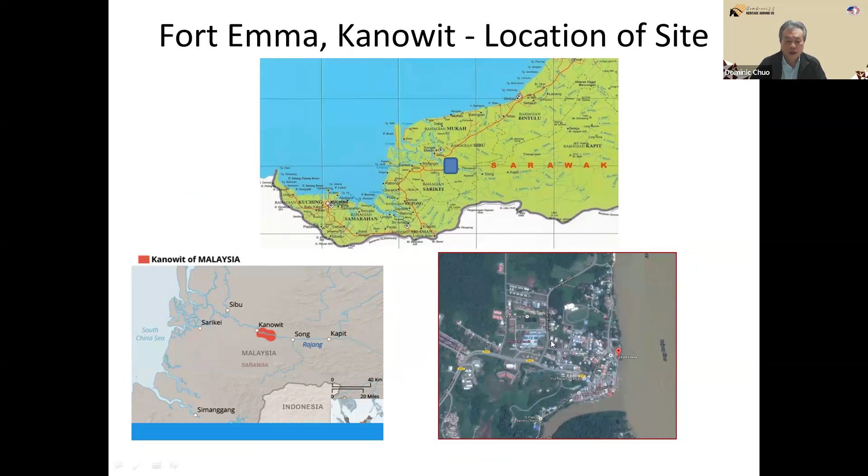This is what it is before restoration, quite dilapidated. There were telecommunication officers there, and it was already declared unsafe at the time before restoration, because due to the erosion next to the building, the Public Works Department had declared it unsafe, so they had to move out and it was just left there. In fact, when we were doing the design at tender stage, there was a big erosion next to it near the town center, town square, so we were actually quite worried the whole building might topple off.

So this is some details. Client is the museum department. Implementing agency is the Public Works Department. We are the conservation architect. We have C&S, M&E, and QS and surveyor. The conservation advisor is Prof. Ghafar for this project. We also engaged a project researcher looking into the history, all the documents, maps, and all that, Cik Noraliza.

During construction, the contractor appointed Architect Haris to be the contractor conservator to do all the documentation. Just for context, it was an 18 month contract, supposed to finish December 2019, but eventually finished 14th of March, just before COVID started on March 18th, before the lockdown. The final handing over was 16th of July, when there was a small window when COVID restrictions were lightened, so we quickly did the handing over.

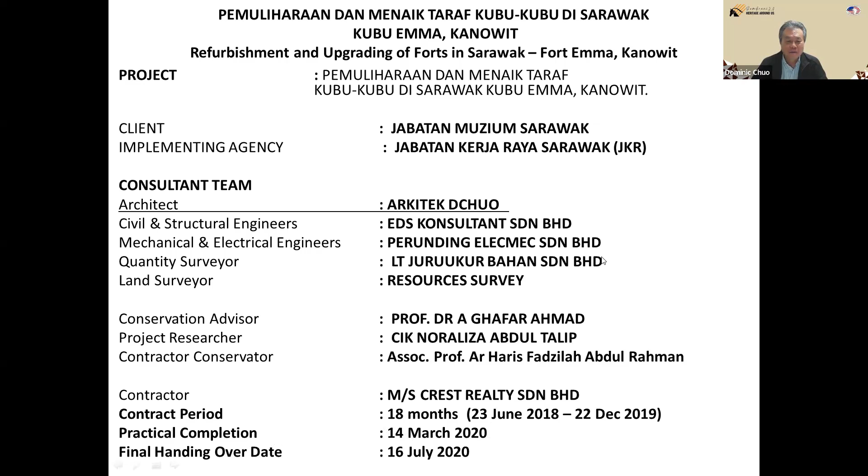So this is the survey of the fort before. You can see near the corner there, that is the erosion, already next to the building. The hatched area is actually the boundary for this fort, and you can see the boundary, the land, is quite small. At the bottom there is the riverfront, and at the top there, the round part, that is the town square. But this is in survey.

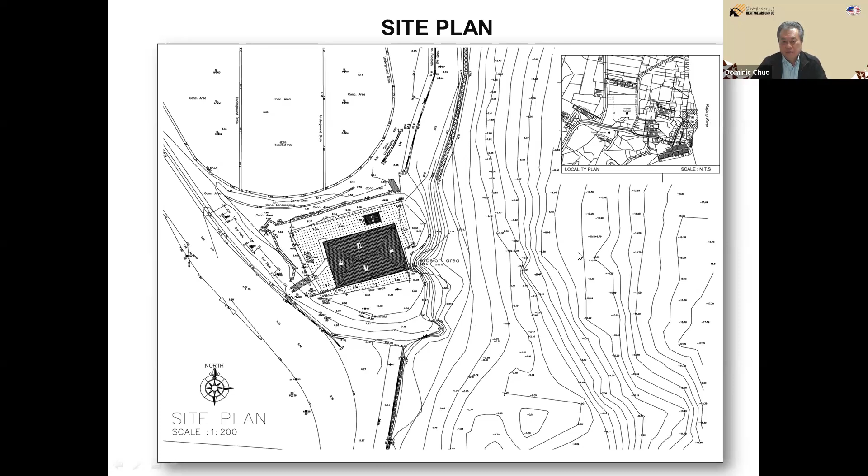Just to give you some idea, you can see on the right top, the erosion is next to the apron already. You must know that the distance from the height of the fort to the river is about more than 10 meters, so it's very high, and it was very risky at that time.

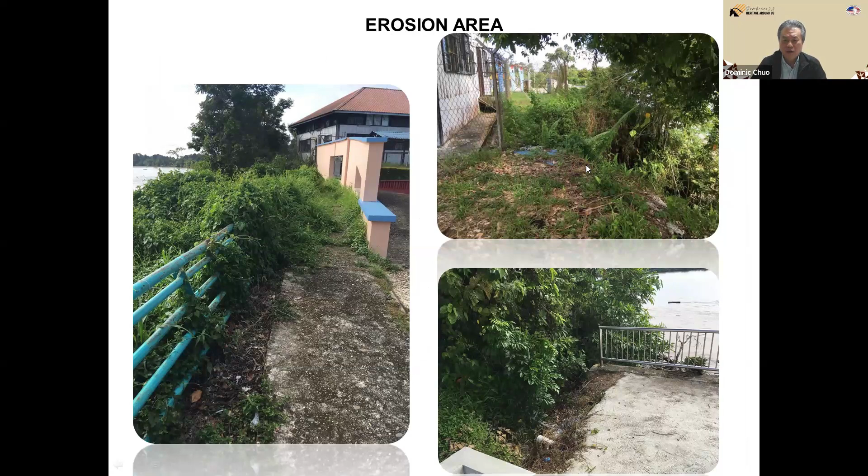So you can see the condition at that time. The first thing we did, of course, was the measured drawing. We spent a few days there, my staff and I stayed there, and we managed to get the measured drawings done. Just to give you some idea.

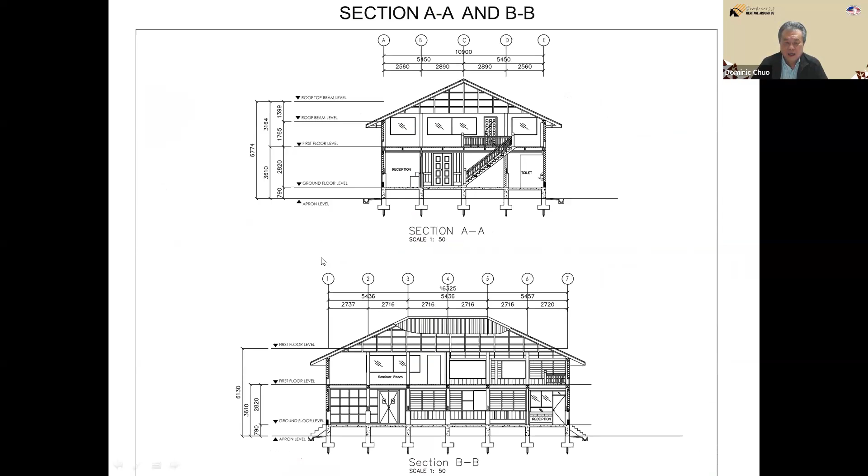And here, there's a toilet on the ground floor, basically a timber platform, and some sort of concrete looking floor with the toilet inside. Upstairs there's gypsum board partition. So this is the measured drawing.

Just to give you some idea, from the left, the waterfront there, so we have to join up. Upstairs, you can see the partition from Celcom, that is the telecommunication company, with all the partition. That's why they had to move out because it was unsafe.

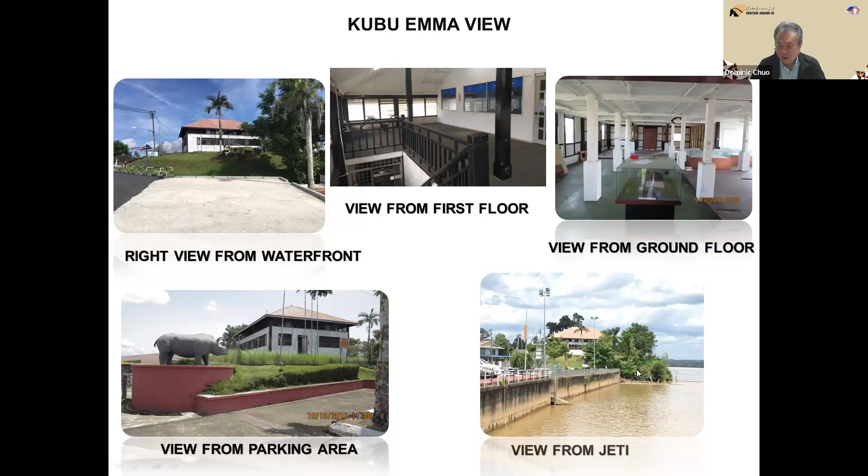Then you can see on the ground floor a lot of concrete stumps there, some already broken, so that's why we were very concerned about the structural integrity. Down there we can see there's a mascot rhino, it's quite common for councils to have a different animal, fruit or fish for the district. On the left and right bottom, you can see all the trees have grown already, so we are actually quite...

After that, at the same time as architect, we also did the dilapidation report and recommended what to be demolished. But basically, we wanted to retain all the original material, that is the belian or the ironwood, the structure, the roof, not the roofing - the roofing normally is already steel roofing, but the truss, the trellis there is not, and then the external cladding and all that.

So as you can see, the stumps are eroded over the years. I think the belian might have eroded, so they just cast some concrete there. Somehow it still stands, so except for the side column, they are all still structurally very good.

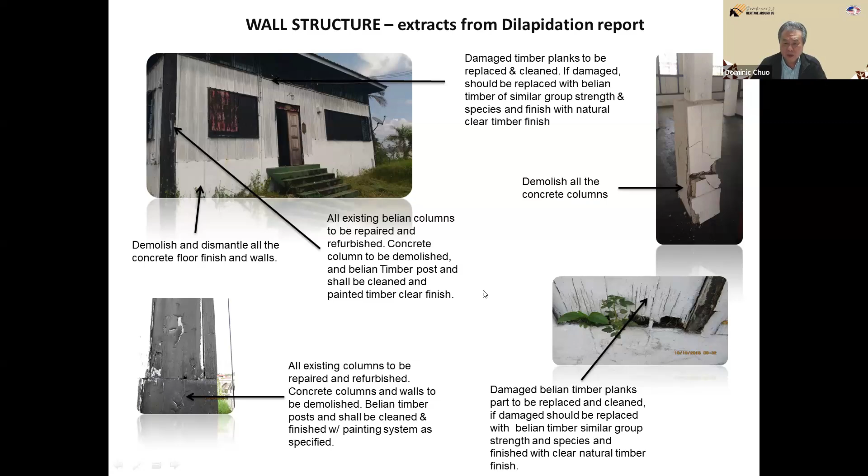Even at the bottom right there, you see the planks. These are all belian planks. At the bottom, exposed to weather, some are already rotten, so they had to be replaced. But we try to retain as much as possible of the original material.

All the windows are actually new ones, so we have to remove the doors, the grill, the astro antenna, all that. Now you can see somehow.

One thing interesting, the columns are all different shapes. Some are round, some are square, some are octagonal. The story is that in the era of James Brooke, each village may have been asked to bring one big column, so they're all different shapes.

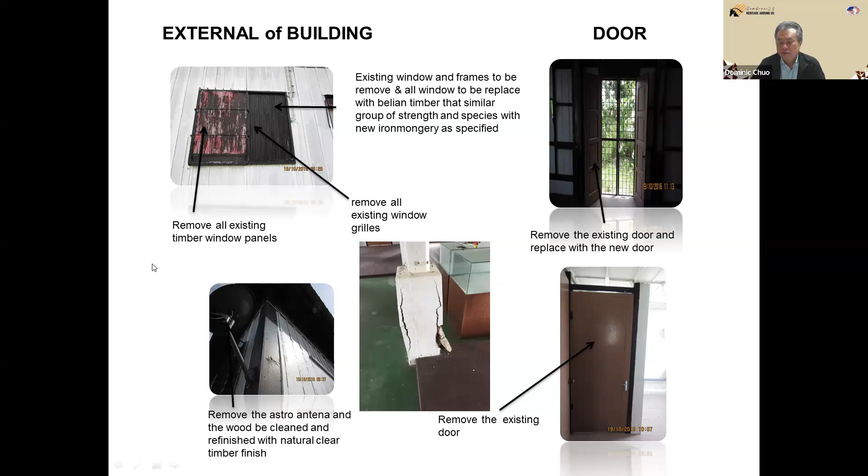Mind you, this one was first built in 1859. James Brooke came to Sarawak in 1841, so this is one of the very early forts that was built. From the dilapidation report, all this concrete, we are going to remove it.

Very interesting, there's what we call a clay crocodile. They assembled the crocodile shape using clay and earth. This one we will retain, we'll just shift it. The staircase is still quite good actually, all belian.

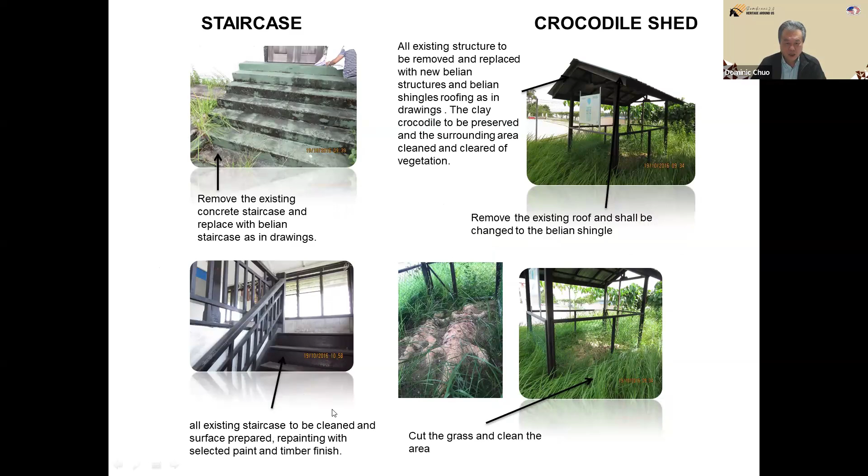So this is our proposal after months and months of discussion with the client, with the museum, and even the public works department, where a couple of architects are handling this project. Everybody has their view, along with the conservation advisor, and eventually we focused mainly on the conservation of the fort itself, and how we handle the erosion, the retaining wall, and the walkway.

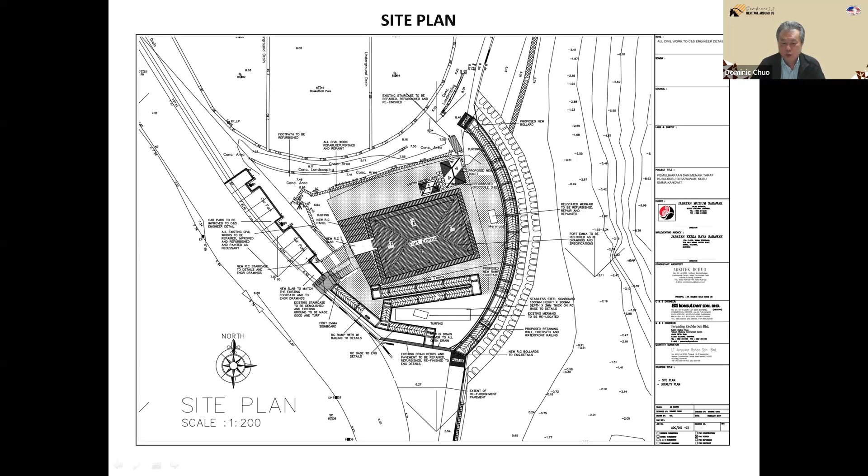So this is what we propose, to join from the waterfront at the bottom up to the town square, and there is a height difference of about 2 meters. So we provide ramps as part of the restoration, which can be used for viewing also, since at the bottom it goes straight to the town center.

So this is maybe a clearer picture. It's actually next to the river. In fact, this is the second proposal. The first proposal, we actually wanted a 2-layer walkway, but after calculating costs and all that, we had to trim it down.

So this walkway is about 70 meters, with a curved retaining wall, and the red building is the district council office. Our restoration focuses on the building itself and the immediate surrounding.

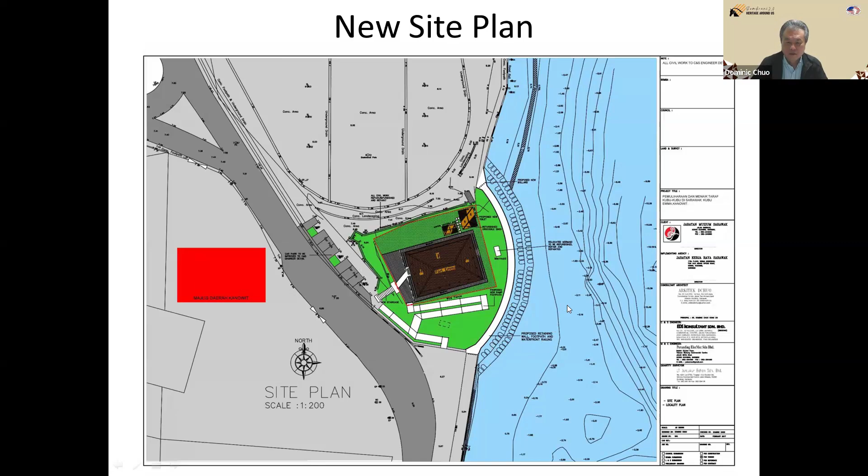You must know the red line here is the boundary for the fort. The other green part actually belongs to the council. The museum has already taken steps to acquire it, to find out, and then after that our design came about.

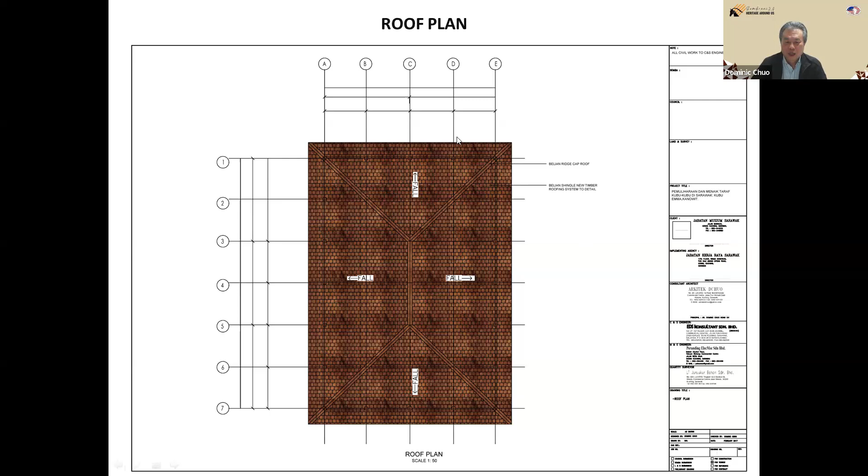The roofing is a very important component. Originally they were all made of belian shingles, but belian shingles, as you know, are not as watertight. So over the years they were changed to steel metal roofing. So in order to have belian shingles back, we have to have different layers of roofing, which I will show you later.

On the ground floor, we took out the toilet inside, which was a bit smelly. We have a counter office, and the blue area we allocated as 3 rooms on the ground floor and upstairs for air conditioning, anticipating there might be exhibits needing air conditioning. But eventually that didn't happen, so we didn't put in that partition.

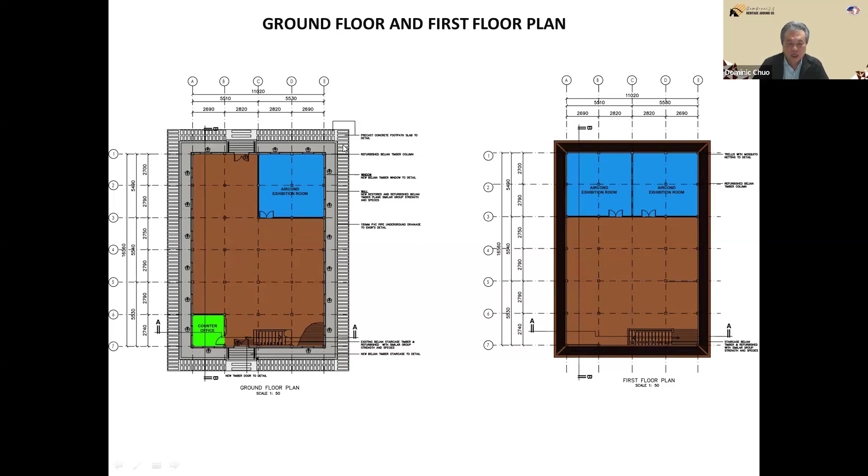So then we have a walkway around the fort itself. You can see the concrete slab, so people can walk around it. This is our final proposal that goes to tender. As you can see, it's like suspended from our research. It's supposed to be like that, but as in most restoration projects, what you tender and the eventual works that need to be done need to be adjusted on site.

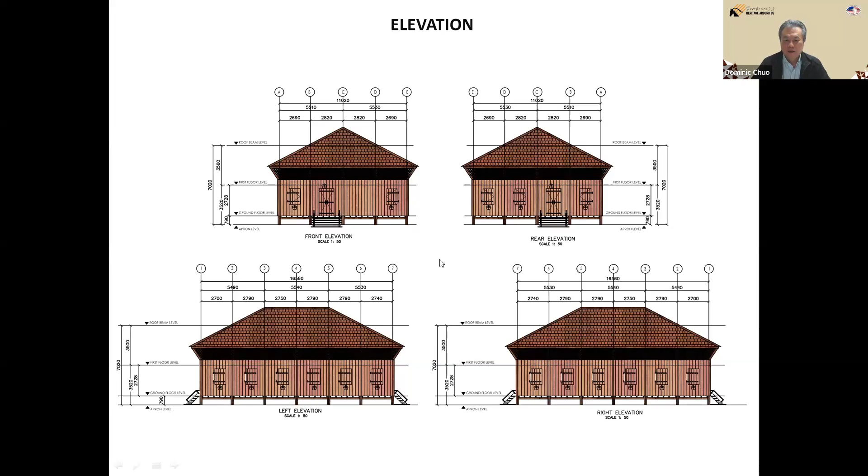And so this is the basis for our tender. This gives you a better idea of how it looks. Except for the retaining wall, it was eventually decided to go with a very smooth gradient instead of a steep one.

This is the proposal we presented to the state government, because in Sarawak, all building projects need to go through what they call the State Planning and Building Design Committee to approve all government projects. Even a small toilet needs to go through it. So these are some of the comments they made.

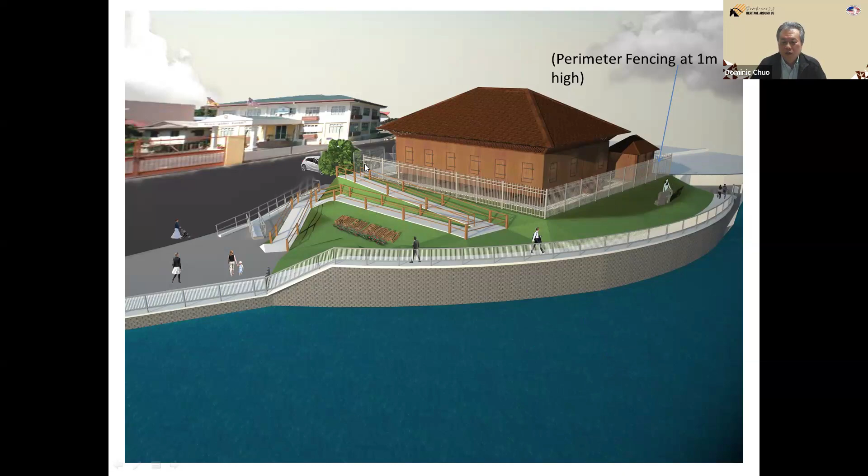Number one, the mermaid, we actually shifted from the ramp area to face the river. For the fencing, we initially put up high fencing, but they didn't want it to hide the view. But for security reasons, when we lowered the fencing, we had to put in CCTV and an alarm.

This is the entrance. It was decided that the entrance should be wider, so we amended all those things.

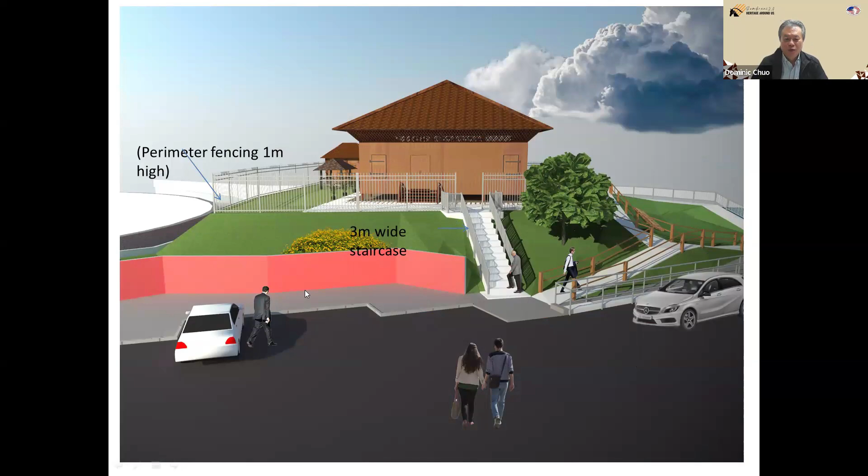Then you go for tender. It's actually one of the longest projects I have done. Usually it doesn't take that long to go to tender, but due to the heritage aspect, there was a lot of discussion and decisions to be made.

After tender and handover of the project, there is a handing over ceremony carried out by the local natives, the Iban. There are three warriors, Prof. Gaffa among them, and a ceremony where a pig has to be killed.

Also, inside the original fort there is a basket of human skulls, I think about 15 or 16 of them, more than 100 years old. These needed to be relocated outside the fort so we could do the work inside. So we made a special temporary housing at the left bottom to hide and keep them there during construction. It's a more spiritual aspect.

So this ceremony involves community leaders, the warriors, and the local assemblyman is here too. They were already allowed inside under the contract.

We have a provisional sum to allow for a few of these community engagement activities, so it has to be allowed for, otherwise there's usually no additional funds for it. The YB, the local assemblyman, is there too.

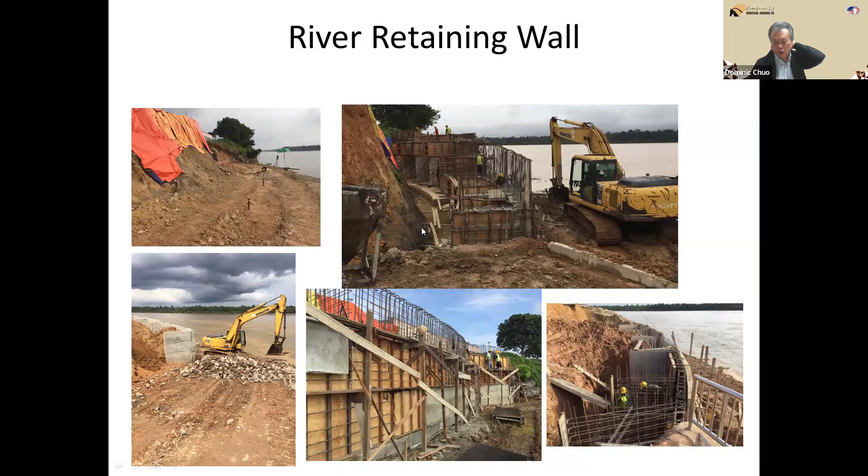Once the water rises, it reaches the same level as the road in the town, so all this will be underwater. That's why we had to quickly build this. We did a borehole test just outside the building and constructed this.

While the retaining wall was being built, we only worked on the inside. We hadn't started on the roof yet, as we didn't want to disturb any of the structures. You can see on the right hand side the column — originally they are white.

All the paint on the timber was stripped off, not by sandblasting, but using a machine similar to sandpapering. It was slow and very tedious, and took a long time.

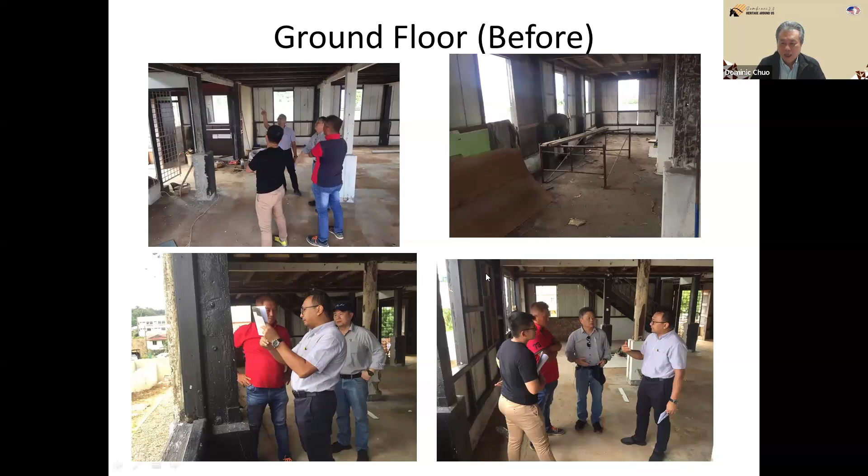The conservator and us didn't want them to destroy the original material, so we took all the paint off first after doing a paint analysis to find out the original paint color and the number of layers. Here you can see Architect Haris, the contractor's conservator, discussing how to go about all this.

It was quite challenging, as you can see in this investigation into the foundation. One of the foundation columns here, we actually had to hack through and see what was down there.

Some of the columns were actually supporting on nothing, because the concrete stump had already settled or something. So somehow the whole structure was still standing. That's why after we went through the investigation, we decided to put a proper concrete stump down there, extend the belian column, and connect it to the existing belian column.

We have to find the grade, that's why all this timber had to be sent to the forest department to verify the type, the strength, and the species. Of course it's belian, but belian also has a few species, so the replacement will be similar.

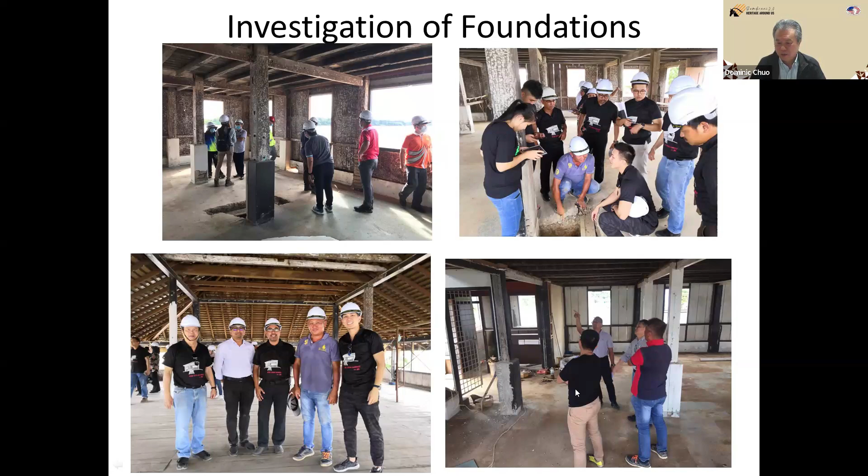So bottom left, we have myself, the two conservators, the contractor, and the public works department architect also. So while this was going on, we had the first community engagement.

As you can see, the works are already carried out, especially on the retaining wall. This is a community engagement where the consultant, the public, and the government briefed the government officers. Most of the people there are from government departments, district office and all that, so it's to educate them on what is going on and what we intend to do. The museum department gave a briefing, myself of course, and then Prof. Gaffa, and then the engineer, the QS, everybody presented.

So this sort of engagement will cost some money, so we already allowed for it inside the contract as a provisional item.

By the time we stripped off everything, this is how the house looked. You can see how the new columns are being spliced into the existing column. So we sort of worked it out like that.

Down there will be a concrete stump, but this time we did it properly, excavating down with proper RC and all that. Initially it looked like a concrete slab, but these were just mass concrete of uneven thickness, some thick, so it wasn't very stable. This took a bit of time, and you can see at the bottom left how it's been spliced into it and anchored into the concrete slab foundation down there.

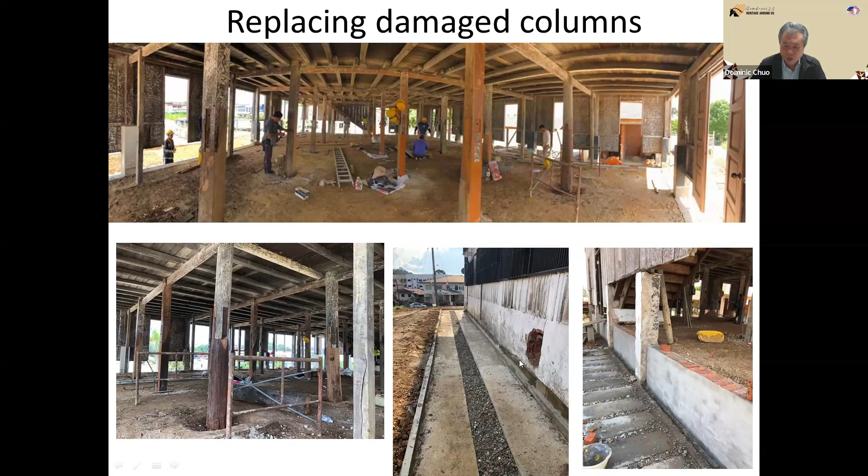In the center bottom, you can see we actually knocked a hole into the wall to see what's happening inside before we took those decisions. That's how it is.

You can see the belian column, the bottom part is new, embedded into the concrete foundation footing. After that, we will do a proper slab on top.

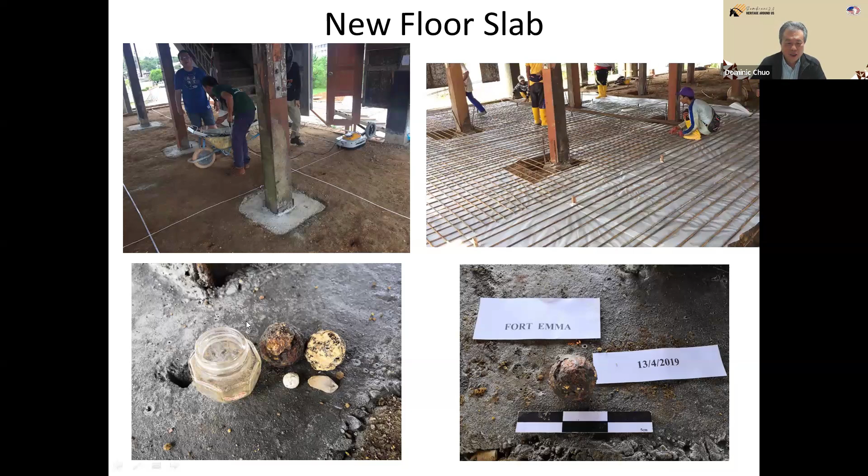I'll also show this: during that excavation we actually did one archaeological pit. Dr. Saiful, you might appreciate this. These are some of the cannonballs that we found. This is the archaeological pit. In fact, we allowed for 3 archaeological pits in the contract, but eventually after they did one, they said that was sufficient.

This company, I think some of them from USM in Penang, had a few experts, archaeologists, from there, and after that they did a report and displayed all the things that they had excavated.

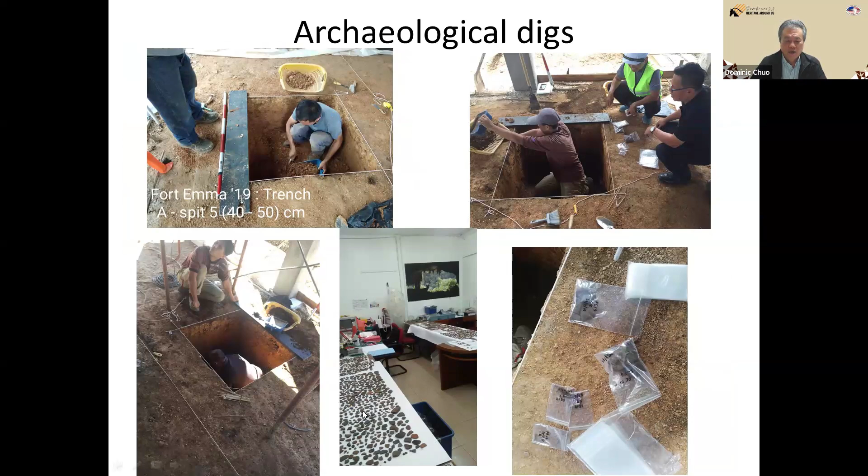Just now you saw some cannonballs and the bottom part of a whiskey bottle. They were able to label it by year. The most bottom one would be the James Brooke era, then the Charles Brooke and different Brooke eras, as the base was built up.

So this is all the equipment they use during the archaeological dig.

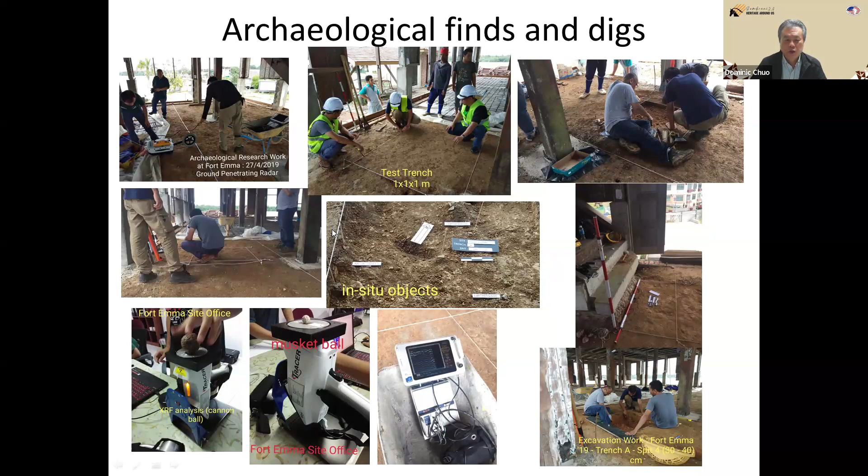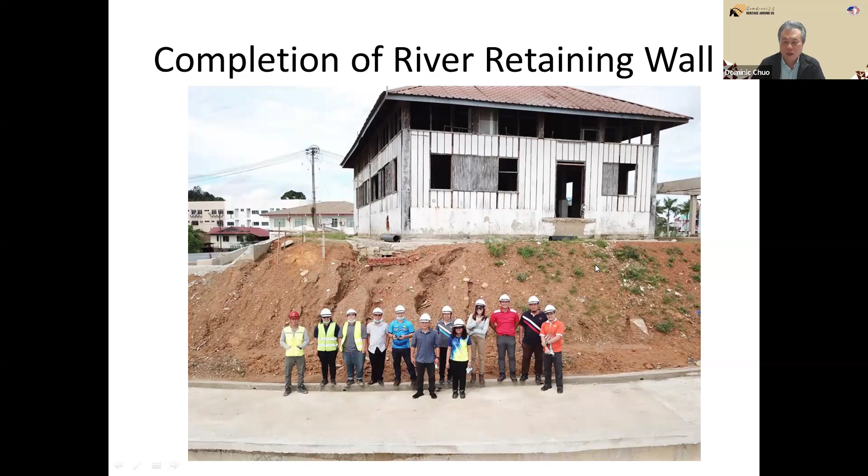Once the retaining wall is done with the big walkway there, the connection, you can see there's a slope, so at least that is stable. You must see the original erosion is up to that corner of the building already. So now with this one, it's stabilized the whole surrounding. And with the works done inside with the columns, the whole building is quite stable structurally.

After the retaining wall completed, we just take a picture. You can see it's actually sloping, it's a 2 meter difference from left to right.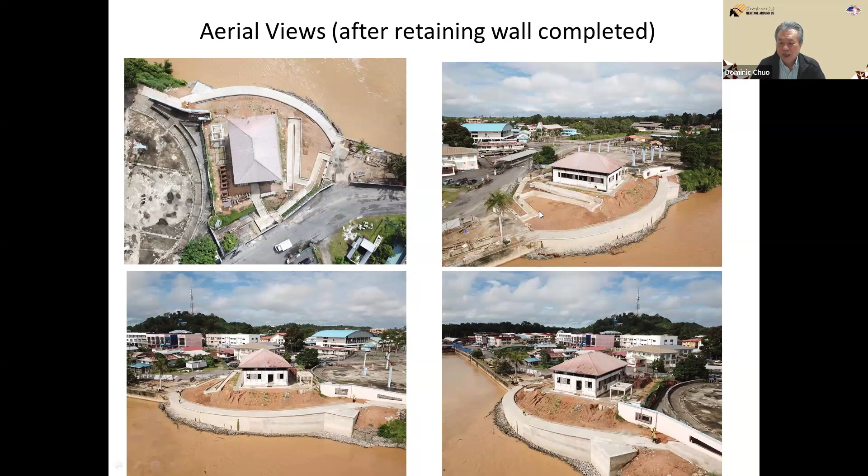At that time, the roof of the building we haven't touched, because we dare not even do the temporary roofing, since temporary roofing needs a structure around it to carry it. So we just did the ramps and the surrounding first.

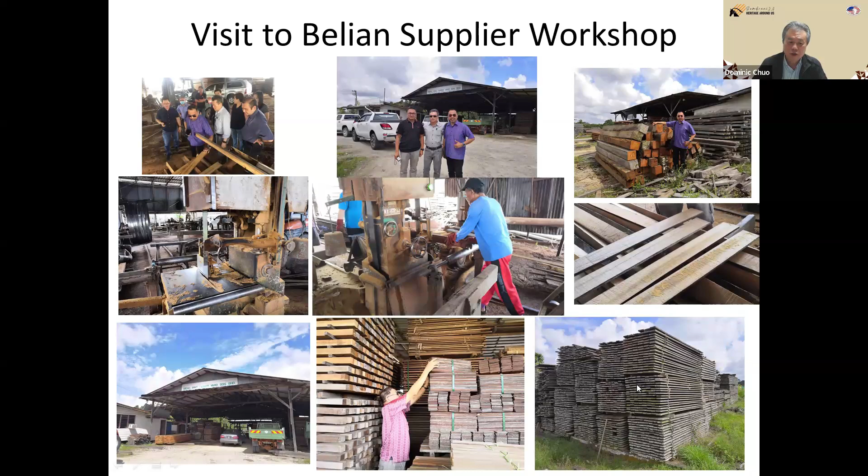As we know we wanted belian shingles, so we quickly went to visit the belian supplier near Sarikei, with the whole team. Eventually we selected well-seasoned belian shingles, 6mm thick or 8mm. We eventually selected the 6mm because it's lighter.

A mock-up was done for the belian shingles. As you can see, the battens, we have a metal sheet, a waterproof plywood, and then insulation and all that. Quite a number of layers to make sure there's no leakage.

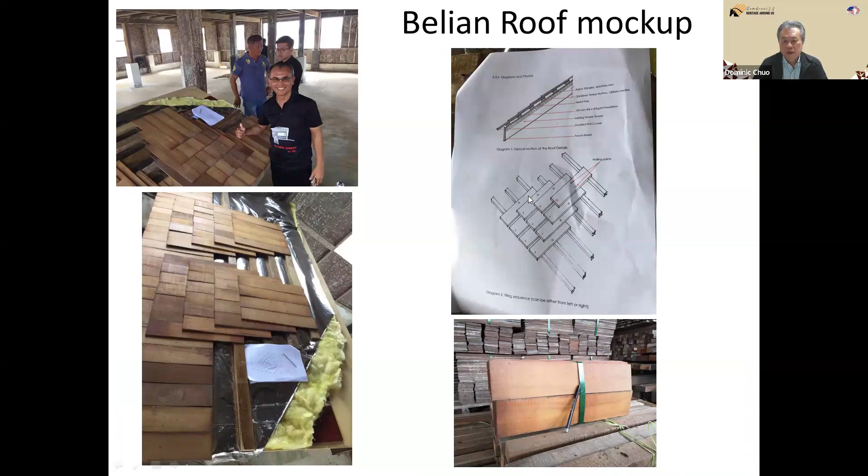After this was approved by everybody, the temporary roof started to come out. So this is just to give you a sense of the scale.

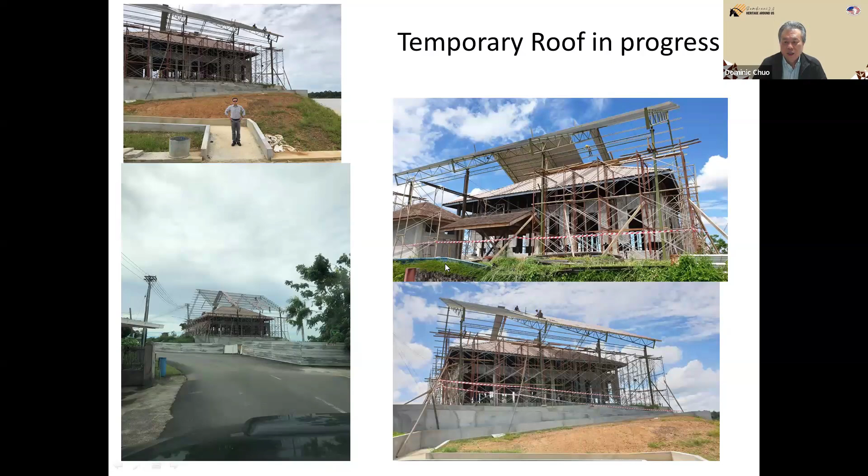It's quite huge. Then halfway through, the second community engagement happened, with different government officers and students from UTS invited. I think about 100, more than 100 people attended.

This is also allowed in the contract. This sort of project, we need to engage with the community, otherwise there'll be a lot of questions and probably complaints. Once they know what's happening and how important it is for the heritage, everybody is more comfortable, because it takes a long time, almost 2 years to finish.

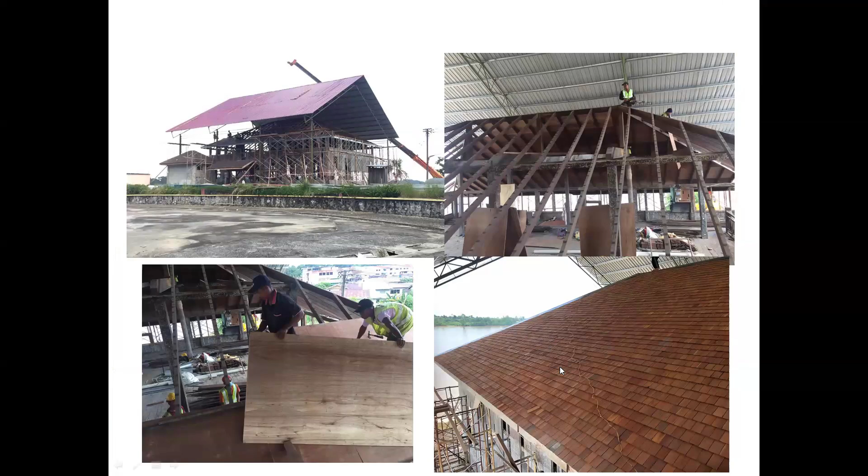These are some of the press releases that we made. So the belian shingles are up. You see the truss, those are original truss, of belian. The belian shingles, you can see after it's done, it actually looks very nice.

That means there are actually gaps in between, I won't say holes. So when you walk upstairs, the dust will come down, right? So that is not preferable. So every piece of the first flooring boards was taken out and refurbished, made straight so that there's no gaps.

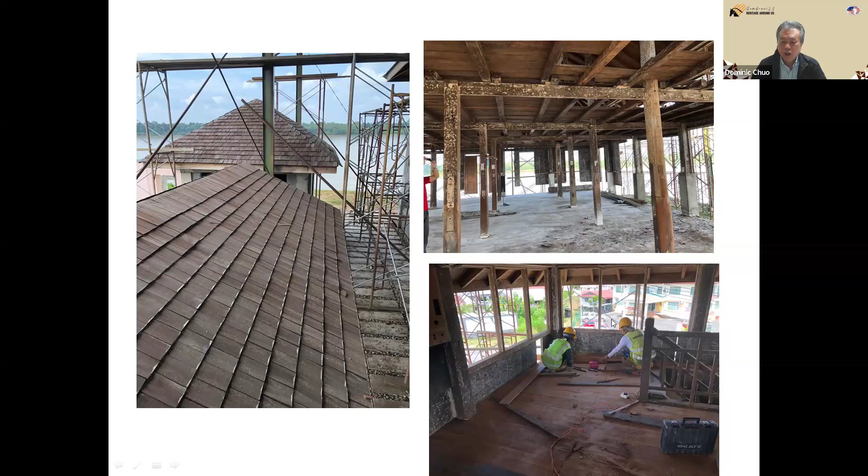After doing all that, removing the damaged part, you can see here near the staircase, these are all new, because after we went through the whole upper floor floorboards, pushing them together to close the gaps, we had to add in new belian. The thickness of that is compatible with the existing ones.

On the ground floor, you can see we put on the concrete slab, as you saw just now, and belian battens before we put on the belian floorboards on the ground floor also, some on the ground floor.

At the same time, you can see all the external panels are already taken off. So we have to clean it up, repair it. Some damage we have to cut off and connect new belian panels onto the existing one.

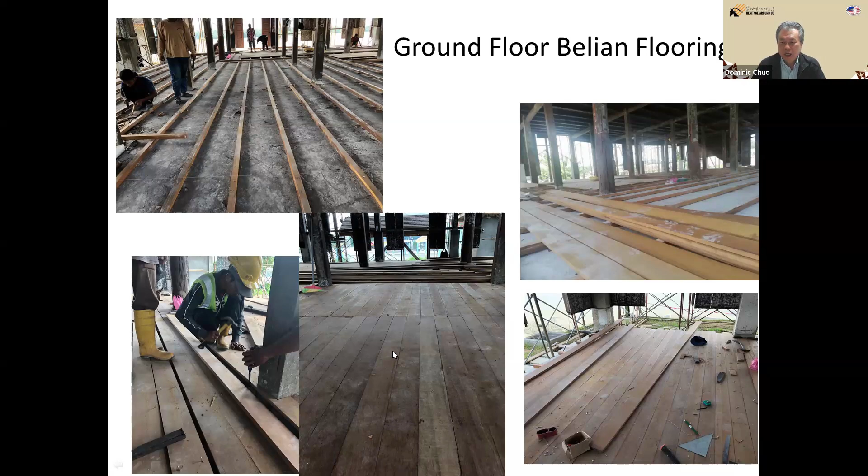But we keep as much as we can, whatever can be used. So you can see, these are all belian timber on the ground floor. On the right hand side, you can see how we splice it in to connect the two columns with bolts and all that. Ground floor and first floor, that's how it finished under the belian shingle roof.

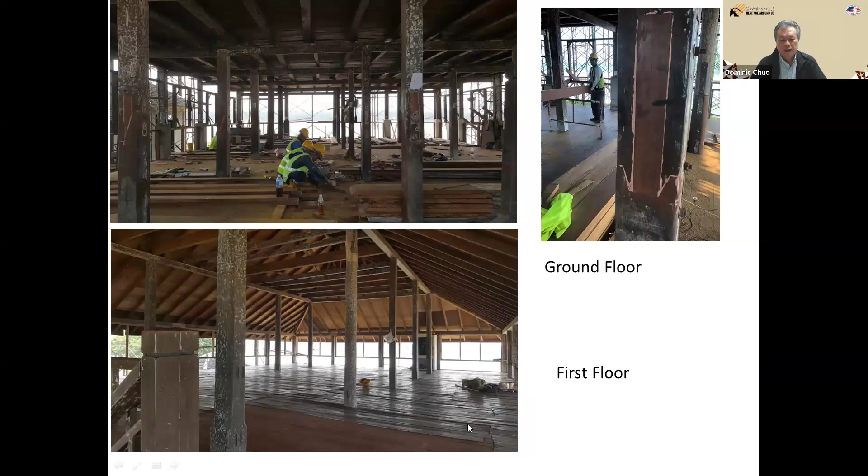What you see is the original truss plus the plywood, that the later will varnish. That will be the finished product. So just to give you some idea on how we do it.

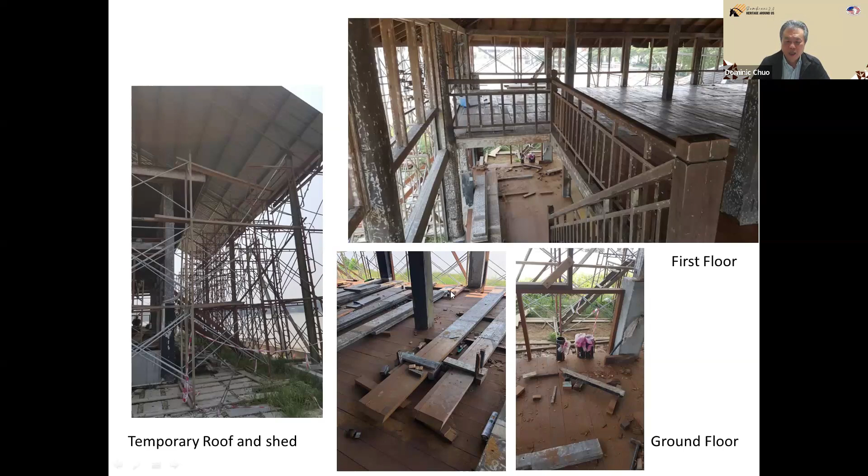The external panels are the last to be fixed eventually. At the center bottom, we can see the external panel. We sort of clean it up, because the wall panels originally had a lot of gaps, which means when it rains, some of the rain will get into the building. So all these are straightened and all that so that it's more watertight.

We also have references from so many forts. So what we can do, especially where some of the elements are missing. On the top left, you can see the windows there. There is this...

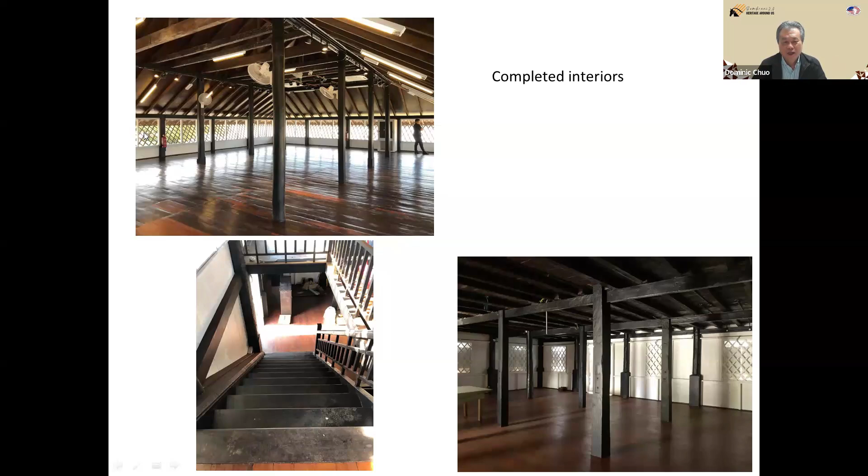Trellis, right? Trellis. Actually the existing one, we don't have any trellis, but most timber forts in Sarawak have this trellis. It's a security feature, so we include that in. And we also have mosquito netting, because even if it's exposed, the birds will come in, all the insects will come in, also very problematic. So like the other fort in Julau, the birds will be making nests up there, so eventually all these have to have insect netting to prevent that from happening.

So this is the finished one from different angles. The front part, the staircase has been widened. You can see the fencing is low. Okay, there's a SESCO post.

Eventually, we applied for this post to be taken off and using the underground utility. And down there, for the aircon, we also cover it with belian sort of boxes to that one, to be compatible.

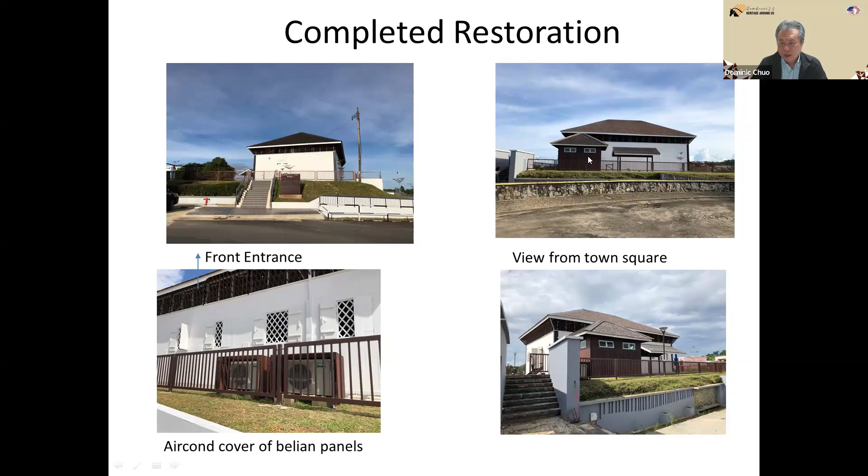And then the toilet, you can see on the right, modern toilet, but only the cladding outside is belian plus the roofing. So again, that's how it looks after we take out. So the whole place has the RC slabs on it.

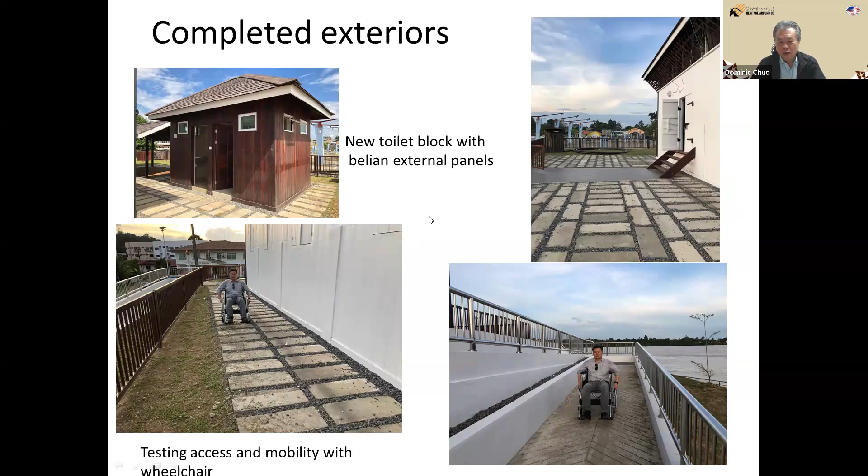So I did test with the mobility for wheelchair on the ramp, which is important also. I mean, it's not like smooth, but it is okay. So after the project, we finish it off there,

So this is the finished drone view from different angles. You can see the waterfront joins up to the town square, and a different angle from the river. As you can see, at that time the river is quite high, right? You can see it's almost reaching the road already.

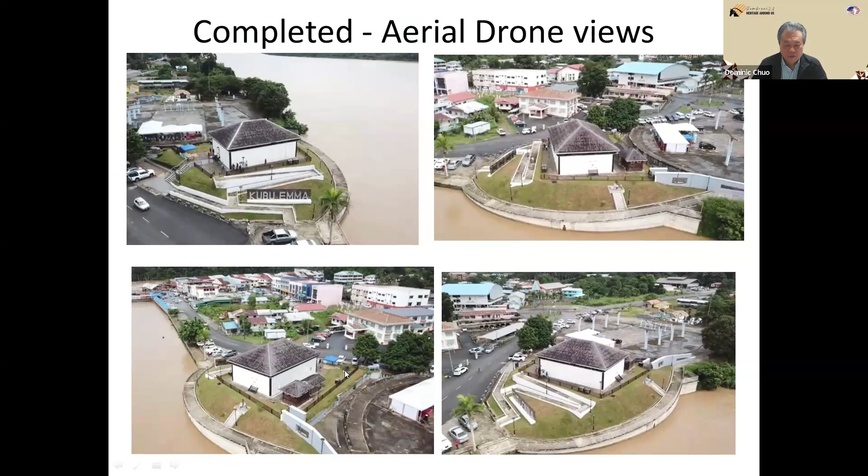It's supposed to be made into a museum, but as I understand, until now the museum is still in the process of putting up the exhibition. In fact, in our contract, we did allow a few hundred thousand for the exhibition, but normally for an exhibition you need a storyline, and then you need to get artifacts to exhibit. So that was taken out from the contract.

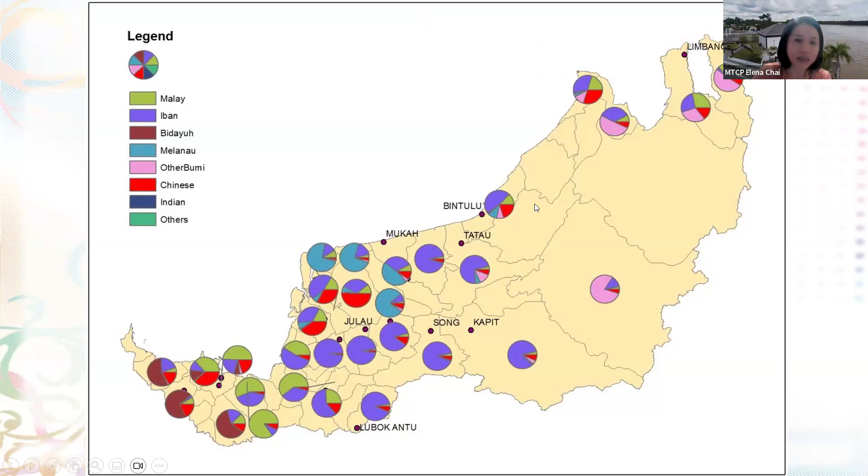If you look at our maps, we have a lot of rivers. There are about 22 major river basins and more than 283 river networks. So in Sarawak you will see Sungai and you will see Batang, which is a very interesting feature. For those who are not from Sarawak, please come and we will tell you more.

So this is one of my research. Today I'm sharing two of my research. One is on the forts and the people, its people.

Forts are a locus for the bazaar town, and most of our bazaar towns are along the river. It is closely associated with the people and their lives. It has become a locus of collective memory, and the bazaar, the fort becomes its defining or distinctive character. In almost every small bazaar we go to, there will be a Jalan Kubu, the fort road. So it is a space, a monument, a place where people group together.

And of course there are some not very happy happenings, where people are tried there, but it is also a place where people come together. Like Fort Marudi, I think the one in Marudi will be my favorite fort because there are a lot of stories. If you walk around and ask the shopkeepers, they can tell you many stories. So it is not just occupying the physical landscape, but it's also part of the social and cultural landscape of the bazaar town.